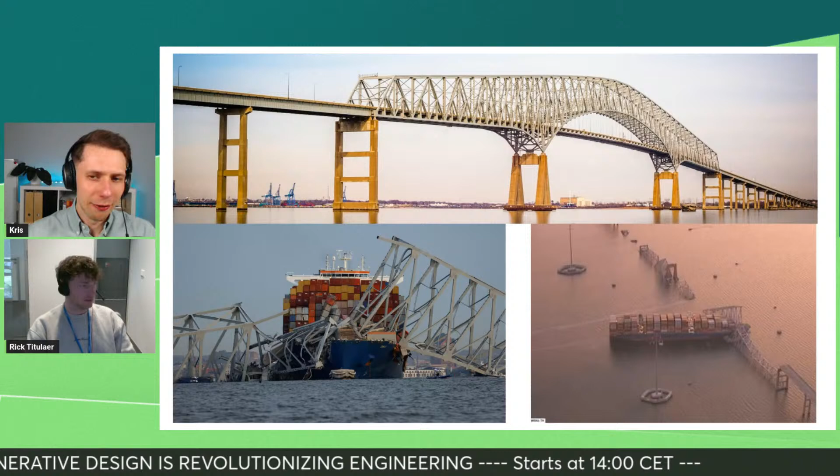But maybe if they're going to design a new bridge, some protection should be included, maybe like 1 kilometer before, some barriers, some lines showing. Because from my perspective as a structural engineer, you cannot design bridges for that kind of hit. I don't know what your opinion is about that. Yeah, that would be ridiculous, because then you would overkill all the sizes probably for once. There are other measures to take, like you mentioned, dimensioning for wind, for earthquake, for all the traffic loads, and in some cases for small ships, but not for one this big. So it needs some protection.

So it was really sad. Some cars were on the bridge, so they are still searching. We are crossing fingers that the people will survive.

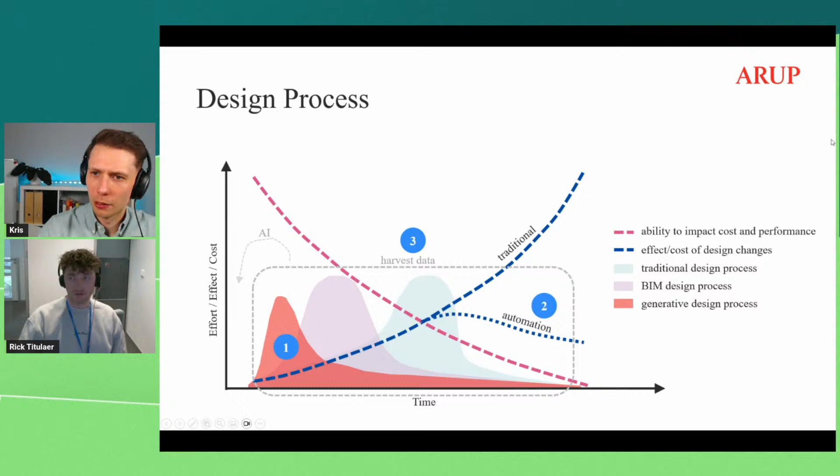Okay. Sure. So then, how do we go into this process? We, as Arup, believe in an integral design process where we tackle these design issues holistically, where we discuss client ambitions, define the boundary conditions of a project, and determine the variables. With this, we can determine our logic, where we can script an algorithm to generate alternatives, if it's buildings, if it's structures, whatever you can think of. And all of these alternatives we link to our analysis. So again, that can be a structural analysis, a solar analysis, a sound analysis, wind analysis. It can basically be anything.

When you run these analyses, it will result in data. And this data we usually define as KPIs, how good it will score. You can explore and evaluate that. And within that, you can do an optimization. So you can go back and change your inputs and iteratively generate more options. And then also you can save that data and push that to visual interfaces to explore design options collaboratively, and get informed data-driven insights. Currently we have done this mostly within Grasshopper.

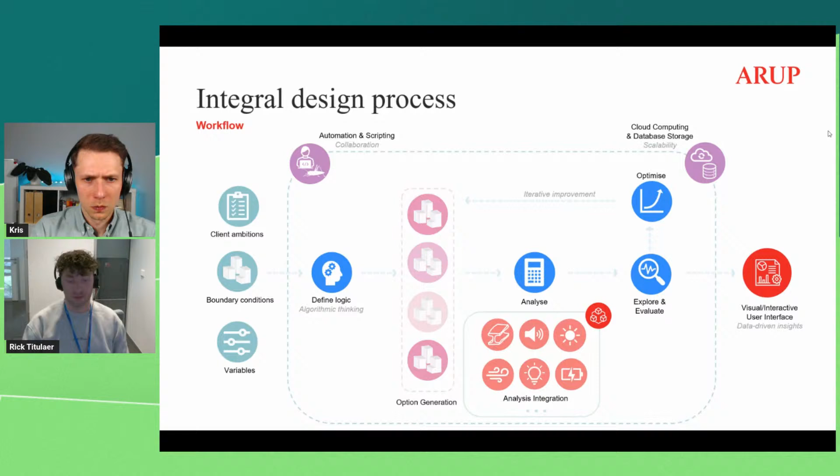So Grasshopper is our main engine, but we've also put Grasshopper in the cloud, so we can run our scripts in the cloud, which helps us to scale and also to store all of the data online. And with this, we can start to explore more options, because in the early stage you need to make thousands of decisions, and then it's interesting to explore the design space.

Like Tristram said, find options that you might have not thought of before. You can actually design efficiently and quantifiably better. You can prove that your design is better than, for example, a benchmark design, because you have that data. And in the end, we aim to collaboratively find the best fit compromise, because the optimum, we believe, is not always there. It's always a balance between different KPIs.

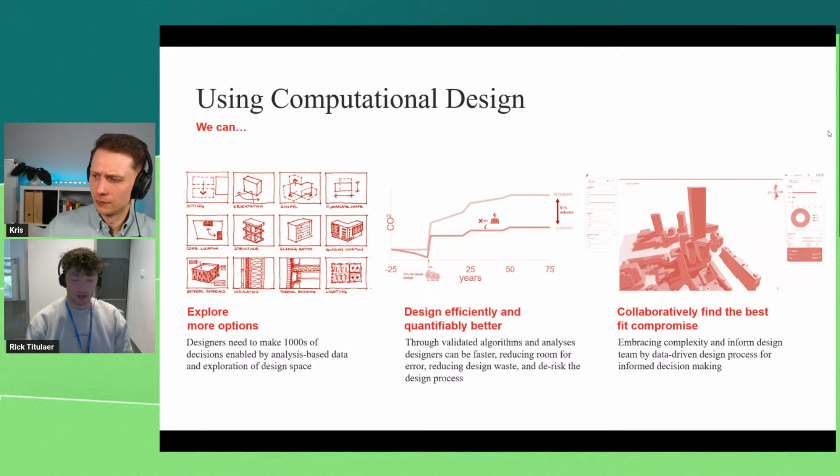In some cases there is an optimum, but I'll show you in some project examples what I mean by that, and also in the live demo in Grasshopper later. Yeah, we know that the term optimum is different from different perspectives, right? From the structural engineer, as we are structural engineer designers, the optimum is a different aspect for our client. The optimum maybe will be the cheapest one, or maybe the most sustainable. Exactly. So that's what we usually face, and I'll now jump to the project examples.

So what can we do with generative or computational design? I'll go from small to big, and I have 4 hopefully really cool projects to show. The first one is actually quite small. It's the Stedelijk Base in Amsterdam. Together with OMA Architecture and Rem Koolhaas, I was tasked to design the structure of this very thin steel cantilevering structure.

As I said, together with Rem Koolhaas, it was very interesting. In my first year in Arup, I got to work with star architect Rem Koolhaas himself. We provided structural design, but also acoustic design, vibration testing, etc. So I have a video. This is the Stedelijk Museum. In the basement, we designed these exhibition walls. They are very, very slender, so prone to vibration. And you can imagine with very expensive art, we need to check if that's structurally sufficient.

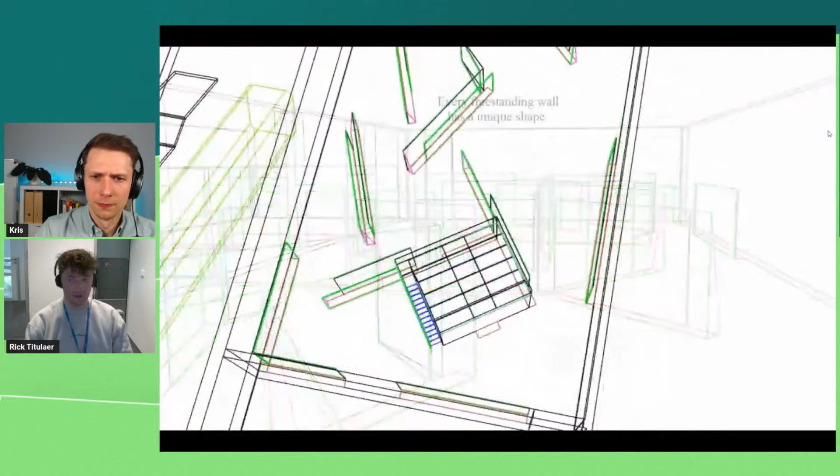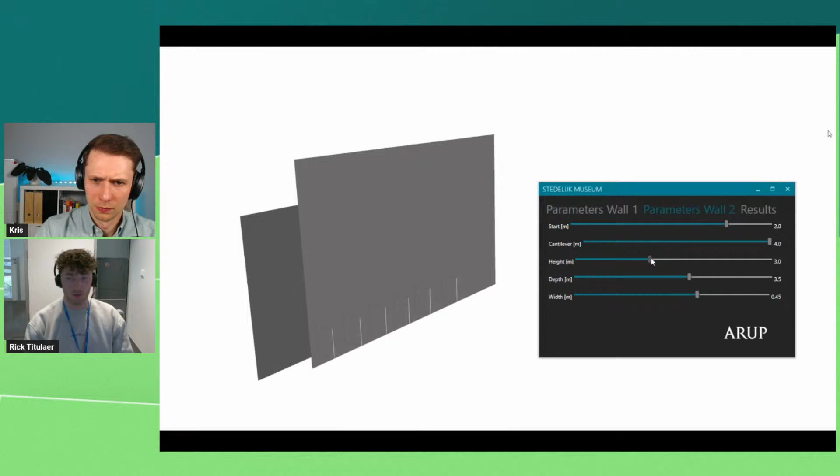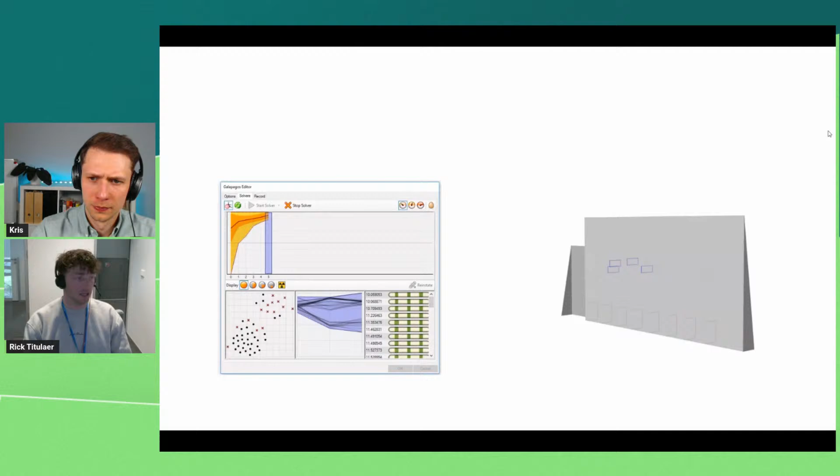As you can see, all of these have a very unique shape and are connected with steel sheets and bolts, so fully demountable. We created a parametric script where you can assess all of these 23 different configurations on static criteria, but also dynamic criteria. What if someone would fall into the wall? We could measure the responses. We stiffened the structure, because it was a bit flexible in the beginning. And in the end, we used optimization, Galapagos in this case, to minimize vibration, to add stiffener plates in between the walls. And this resulted in a very unique exhibition space with limited amounts of vibration.

And also, the exhibition walls were there for 5.5 years. They were recently demounted and recycled, unfortunately. But many people were very enthusiastic about the very slender structure of just 15 millimeters and 4-meter height. And there were art pieces hanging from these walls which would cost more than $1 million. So I can imagine it should be good optimization for all the vibrations and so on.

Yes, yes. And also Rem Koolhaas really loved the process, because we had sort of a random pattern of these stiffener plates, but also we tried to minimize these plates to find an optimum. And he quite liked that interaction between the walls, which actually worked quite a lot to stiffen it up. And it looked really, really cool. We had a lot of different configurations and constructed it.

And you can also imagine, because you could actually touch these walls when they were still there, we had to test different cases. So in one case, we tested what if an electric wheelchair would bump into the wall? What would be the vibrations? And we had vibration criteria for all of these expensive paintings so that they would not fall off. So that was a really cool case as well while we were constructing this. Yeah, always testing that on site is really amazing, and just comparing results. Exactly. It's the best we can do from the structural designer perspective.

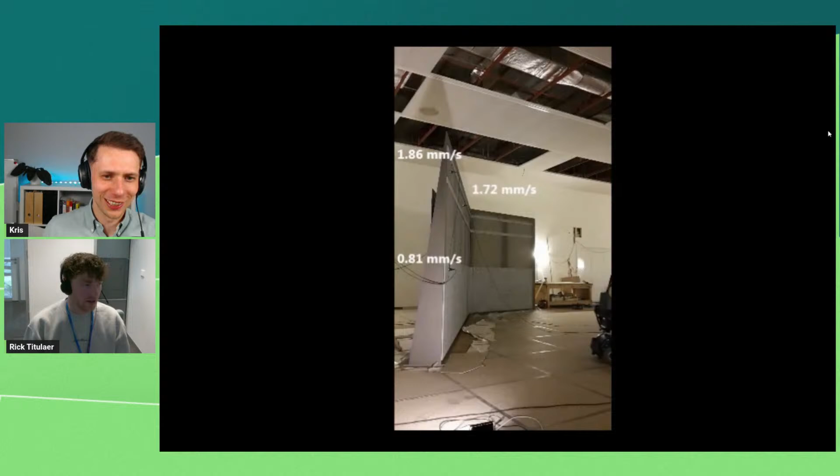All right. Next project, Kris? Yeah, let's go. All right.

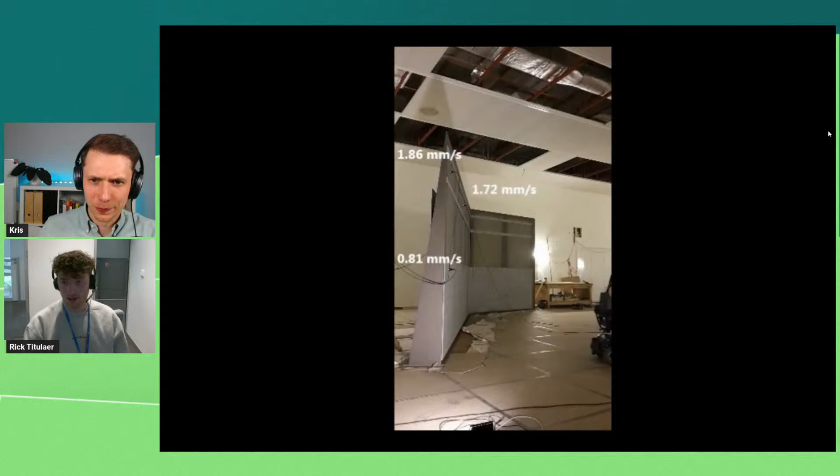So the next one is a bit bigger. It's a project I've been working on since COVID started. It's a residential or mixed-use development in Amsterdam called Elemento, of about 14,000 square meters with Koschuch Architects. We delivered multidisciplinary services on this project, which means structural design, building physics, acoustics, etc.

And the concept we came up with in the competition was to generate a building that would be shaped by the elements, because it would be positioned in what we call the Arup triangle, a few projects in Amsterdam which were done by us. We wanted a very healthy and comfortable building, so looking at sun hours, daylight, wind, and exploring different configurations on different scales.

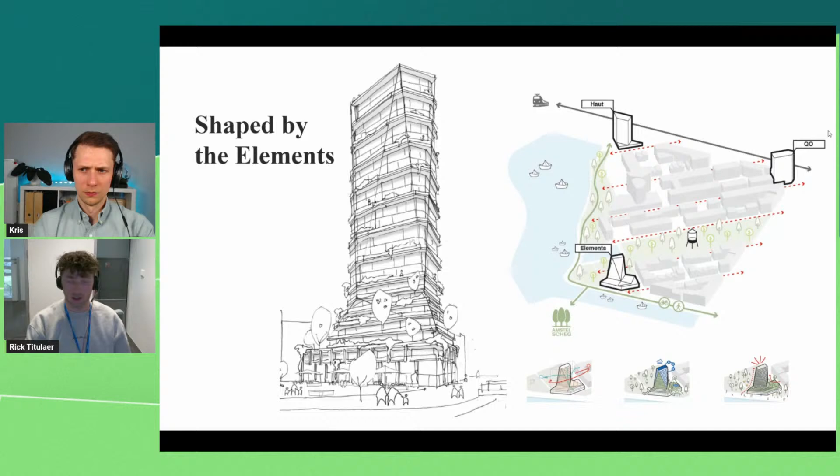On the building scale, we wanted optimal daylight conditions inside the floor plans and optimal sun hour conditions, because we love the sun in the Netherlands, in the atrium, but also on the neighboring buildings. On the neighborhood scale, we wanted to get the green from the neighboring parks onto our buildings and have a good wind climate on the roof and on the ground floor. And on the planet scale, we wanted an energy neutral building, so we created balconies around the building with PVs integrated.

And we were able to reduce the embodied carbon by introducing quite a lot of timber in the structure as well. So you can say that the most optimum solution in the Netherlands is the structure with the most daylight, a lot of sun, and very sustainable. That's what we aimed for. We couldn't build all of this into our script at this stage, because it was a competition, so we had to come up with solutions very quickly.

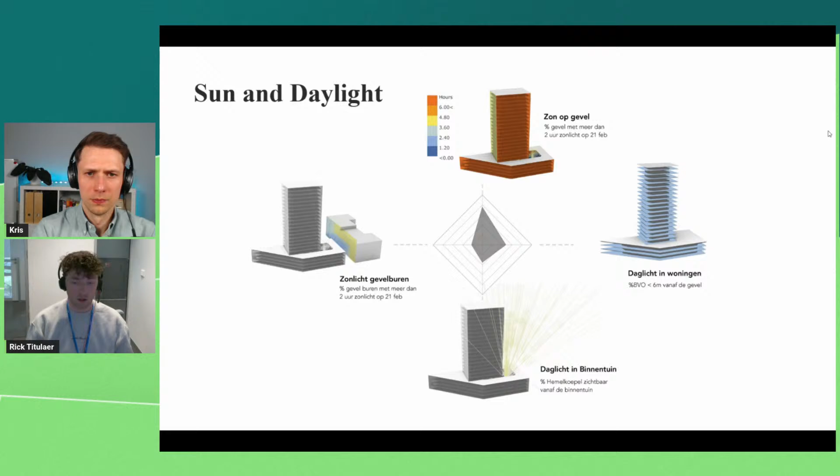So we came up with the most important ones for shaping the tower, which were sun and daylight. Basically sun on the facade and on the neighbors, daylight in the atrium or garden in the center, and on the floor plan. And then we said, okay, what if we let the computer come up with different shapes of the tower? What would be optimal for these 4 KPIs? So we created a script that could generate different forms of the tower.

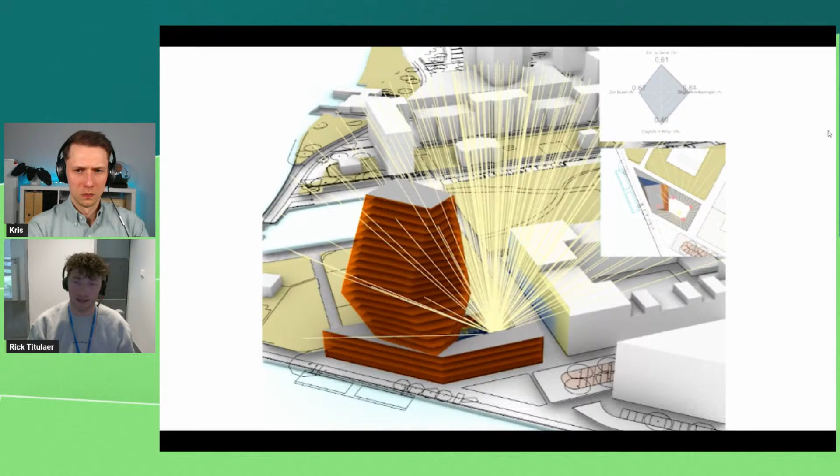Initially it was more like a pyramid, the first sketch from the architect. But in the end, we got solutions that scored better on these 4 KPIs, with more of a cantilevering structure to the middle and more narrow to the top, which was quite interesting. We ran through thousands of iterations and came up with the concept of this cantilevering tower, where the balconies would provide optimal PV to store or get energy from. It also helps with the wind climate in and around the tower.

We could introduce more green area on the roof. And we reduced the carbon footprint by implementing timber in the top floors, where we had the double height apartments. So the in-between floor would be a timber floor, and we designed the plinth to be timber as well. So quite interesting.

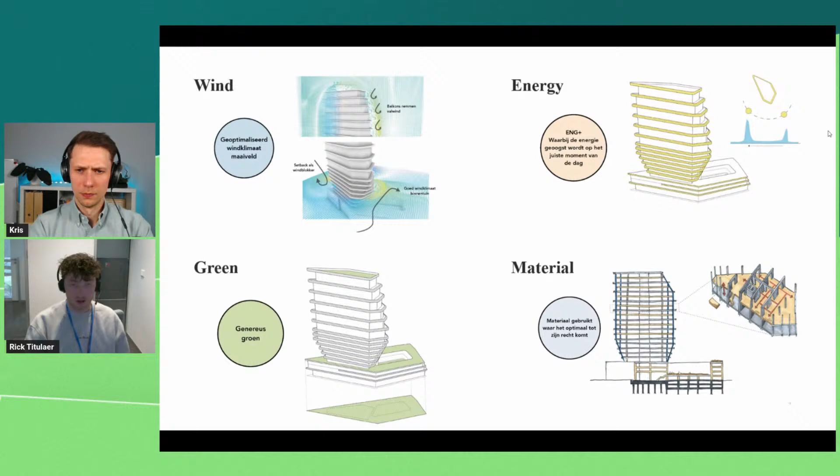And currently, my role, I started in 2020 on this project as a parametric designer and structural engineer. Now my role is lead structural engineer on the project. So I'm finishing the project hopefully next year.

Interesting. And about the optimization algorithm, I saw that there was some limitation from the project. I saw the curves, like the yellow curves from the basement floor. Was it some limitation on how much sun will go inside, let's say, a restaurant there or some atrium? Yeah, so there's also an inner courtyard where there's

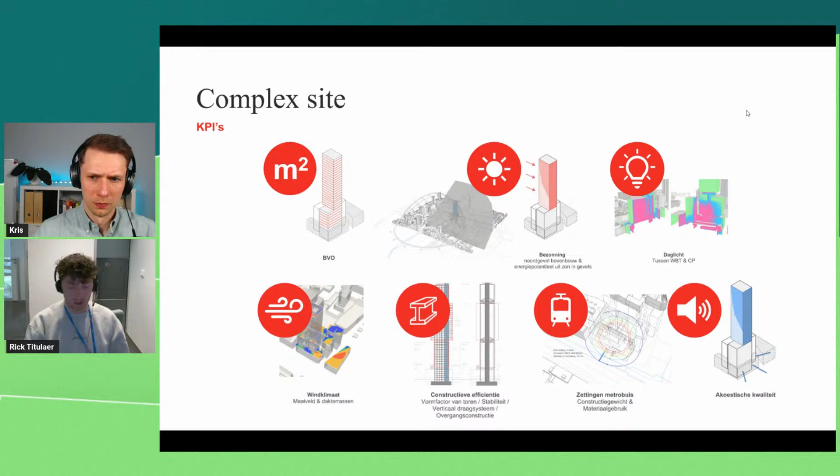model, where you try to find the wind patterns and where the wind speeds get higher and lower. That can take up to 4 hours for one model. So within Arup, we invested in research where we could actually predict the wind comfort or the wind speeds within milliseconds or seconds. So instead of running 1200 CFD models in 200 days, we could run 1200 machine learned models in 20 minutes.

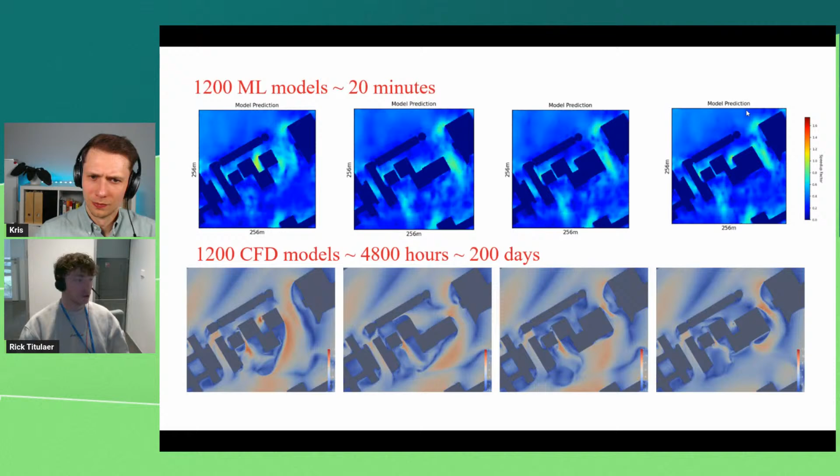And this really helped us to explore the design space of this tower. So we did lots of configurations of the top part of the tower, looking how it would affect the settlements, playing with the daylight on the building next to it, rotating, cutting off the tower on the top to see how that would affect the sun squares where people were sitting on the terrace. And in total, in a few weeks, we designed up to 11,000 options and analyzed it to about 20 KPIs.

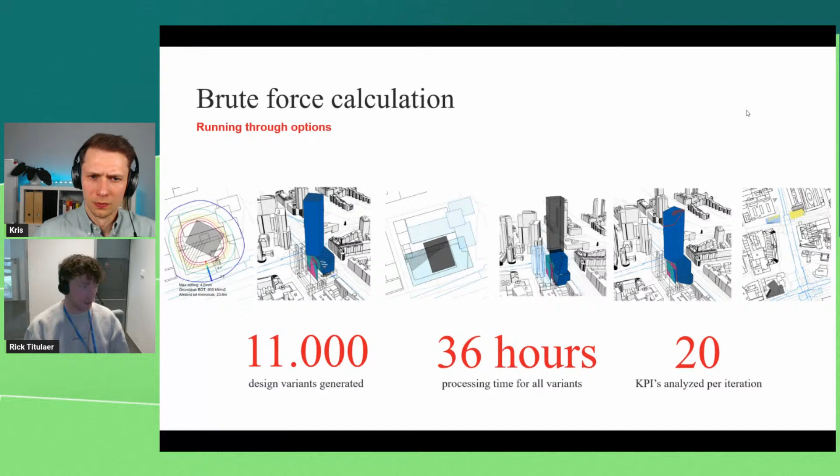And you might think then, how can I make this presentable to our client? So we made use of our own built parameter space, which looks like Thornton Tomasetti's Design Explorer. I'll show that later. But parameter space basically is a visualization of your data. Each line in the space is one design option.

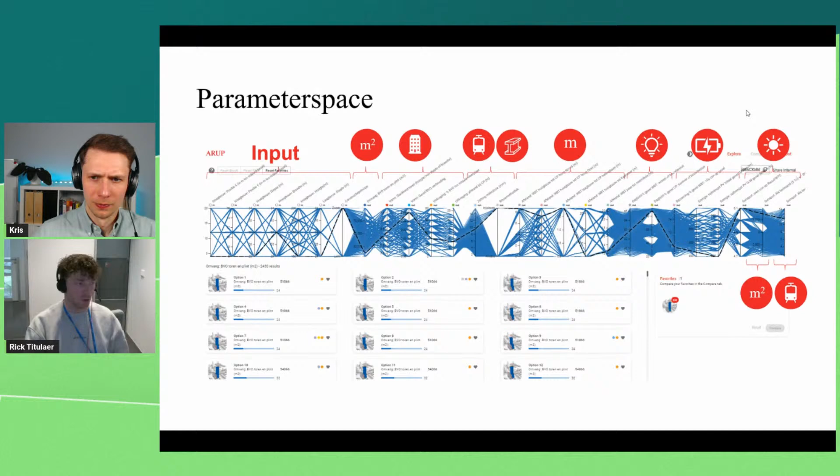And with this space, you can actually filter. So you can say, I want to minimize my settlements, I want to maximize my sun, I want to maximize my daylight, and which options fall within that criteria. And it's a really interesting way of designing because you can actually explore different configurations on most important KPIs.

So here you see the final 3 options. So one option might be really good for sun, daylight, and settlements, but another option might be really good for constructability. We also put in a constructability KPI. Let's go back one more time. Distance to other buildings, energy potential. So how much energy can we get with PV panels on the facade?

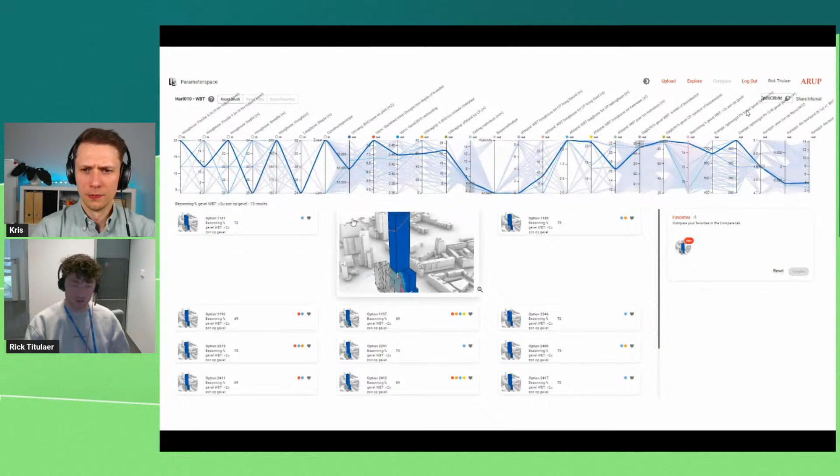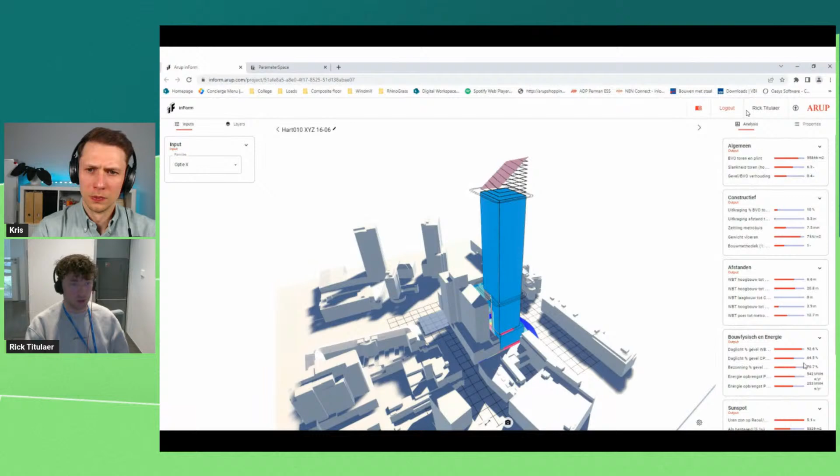And in this way, we actually came to 3 completely different options that were chosen by the client and the architect. So we actually provided this space to them, and together we chose 3 options. And these 3 options were then presented in our Inform platform, which is a visual interface of our design solutions, where we can explore KPIs on the right hand side and explore different inputs on the left hand side. And this then helps the client to interact with the model, to go around, see how the shape of the tower will look like.

And in the end, after the pre-concept design, after these 3 options, we created one option W, and that was the option that we're designing currently. So this is the view from the tower, and on the right hand side you see the current design that we're progressing as we speak.

And the software that you provided to the client, have you created these graphs yourselves, making all this optimization, just showing graphs and solutions? Is it your design in Arup? Yes, it's an Arup platform. We started to create that 4 years ago, and now we gradually build it up so the client and our design team can interact with our parametric models.

They can explore design solutions, see what if they change one parameter, how would it affect different KPIs. And usually the feedback is really positive because they can actually see the difference going from a benchmark design to option 1 to option 10, that it actually is better. So yeah.

And the workflow was like you suggested three solutions that, in your opinion, were best for 3 different scenarios, and then in the platform Inform, you presented the solutions that everyone now can discuss and choose the best one. Exactly. So which one was chosen, just from curiosity? So it was a combination of X and Y. So they actually merged X and Y into W.

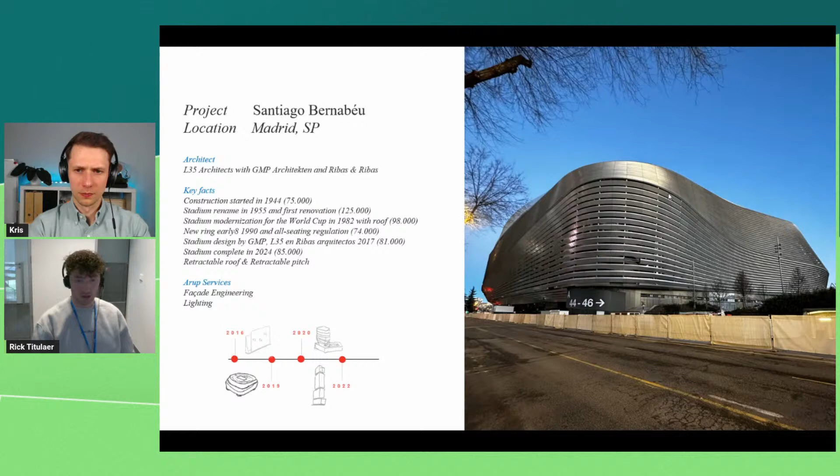We got to help on the new Santiago Bernabeu Stadium, which was originally constructed in 1944. Over the years they did quite some renovations, and now they wanted a big renovation in 2017, when they came up with the design featuring an iconic facade, a retractable roof, and a retractable pitch. We were doing the facade engineering and lighting design - just one section of the stadium design, which is almost intact from the original except for the roof and the new facade around it. They upgraded some of the towers in the corners to carry the roof.

Two quite innovative features, which I'm not going to talk about but are very cool, are the retractable roof - there are many videos on YouTube now because it's actually there - and the retractable pitch. Without going into detail, maybe Kris can send you some links later, but it's really awesome. I will talk about the facade design.

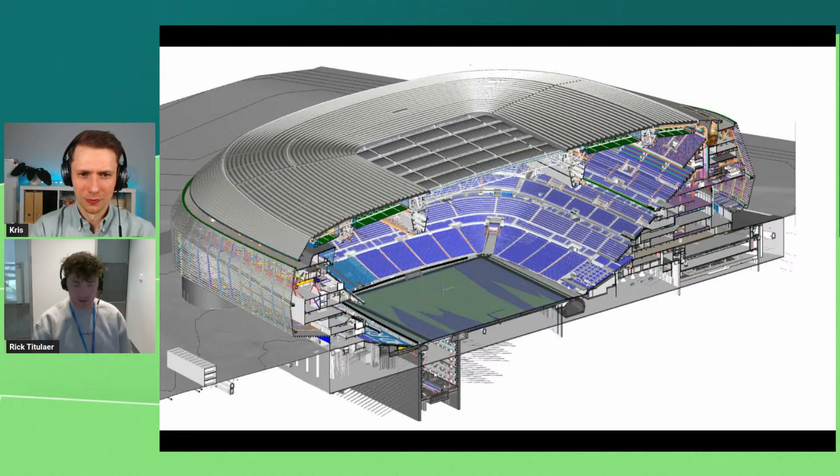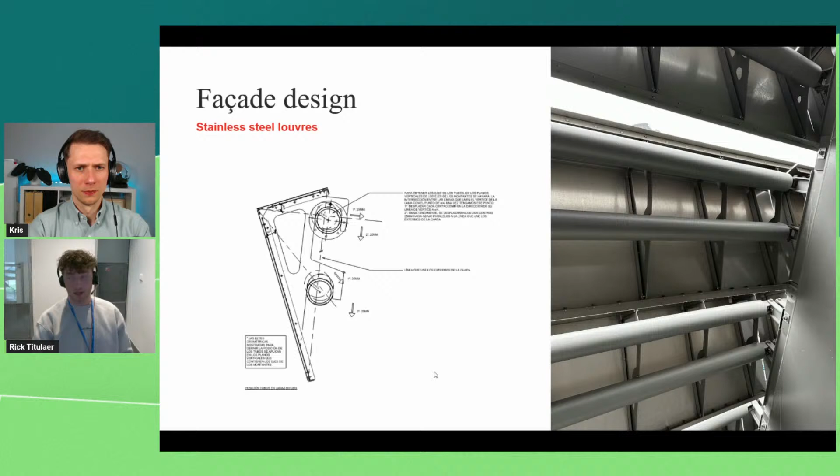I helped with the facade design - a complex geometry of more than 11,000 panels. They designed a system to hang these triangular panels from a secondary supporting structure. But you can imagine, with the complex shape I've shown in the previous renders and videos, it might be very hard to construct, or very prone to errors, etc.

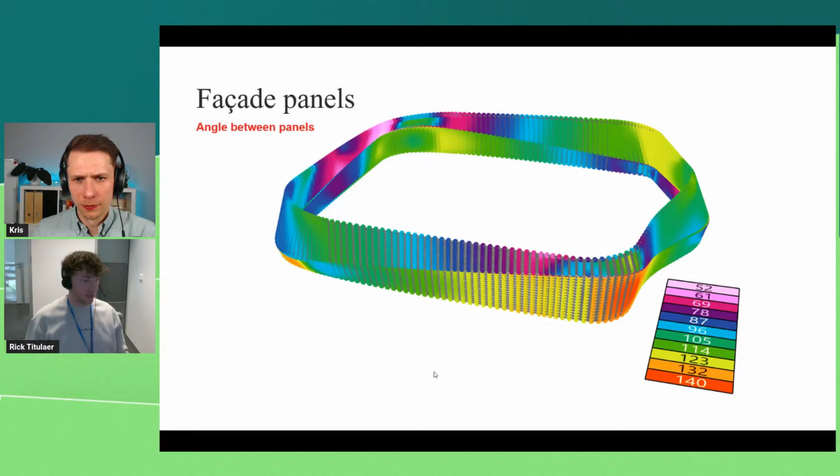So after some initial exploration of the geometry - like the angle between the panels, looking at these nice rainbow coloring images - the most interesting question came up. I don't know if you've heard the story about the car that was fried in London. They were very worried about cars and people being fried by the stadium. So we had to explore how the sun would reflect off the stadium into the environment, because there were big roads next to the stadium, but also large building blocks that might have issues.

First we generated the geometry parametrically. We ran a glare analysis, which is a reflection analysis of the sun. Then we explored configurations of the facade that could be better for reflection. We recreated the geometry, which would be the final geometry constructed today. We did some validation with more detailed glare analysis software, and exported our final design into Unity for presentation to the client. So what is glare?

It's basically the reflection of the sun on the facade to the neighbor, to the outside. We actually analyzed all these panels from the original geometry, and we could see there were quite some worrying cases affecting the buildings around and the roads.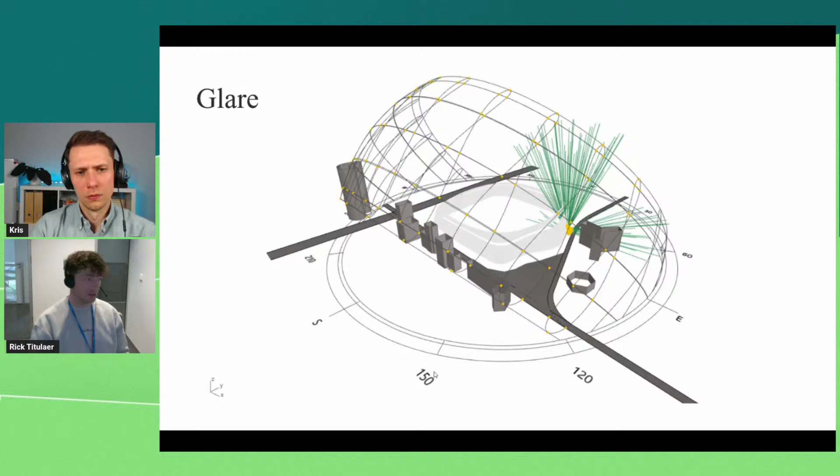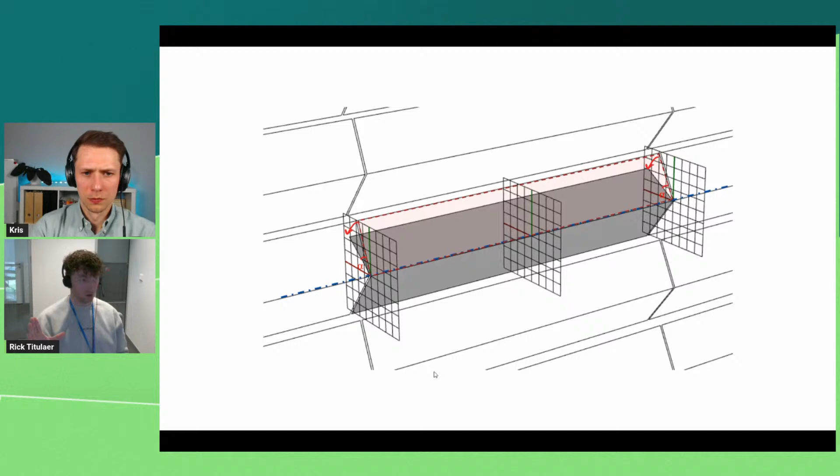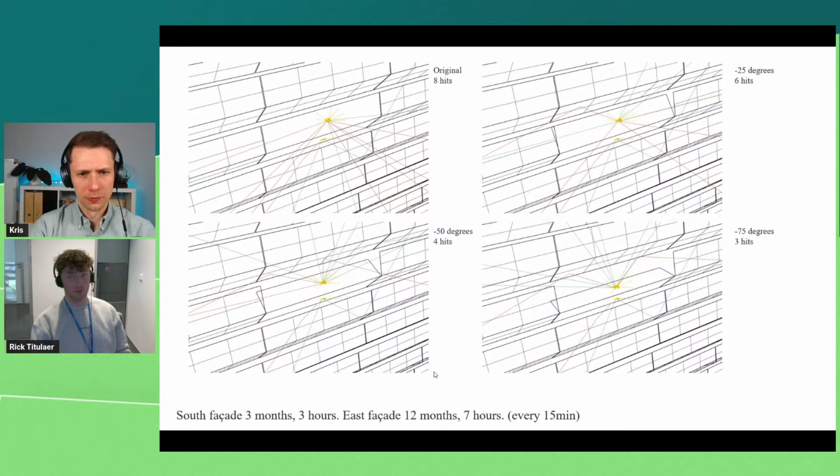So we decided to change the geometry to find better solutions for the facade. How we changed it was basically shifting or tilting the panels slightly or more to see how that would affect the reflections on the neighborhood. The whole shape of the stadium stayed the same, you just tilted the facade angles. Yeah, so the original shape we got from the architect, and we decided to explore new configurations.

Here you see one example panel. If you rotate it more and more, you go from 8 hits for this specific point to 3 hits, but then the facade geometry is completely changed. So it was also in discussion with the architect, to what extent can we change the geometry, and to what extent are we improving the glare.

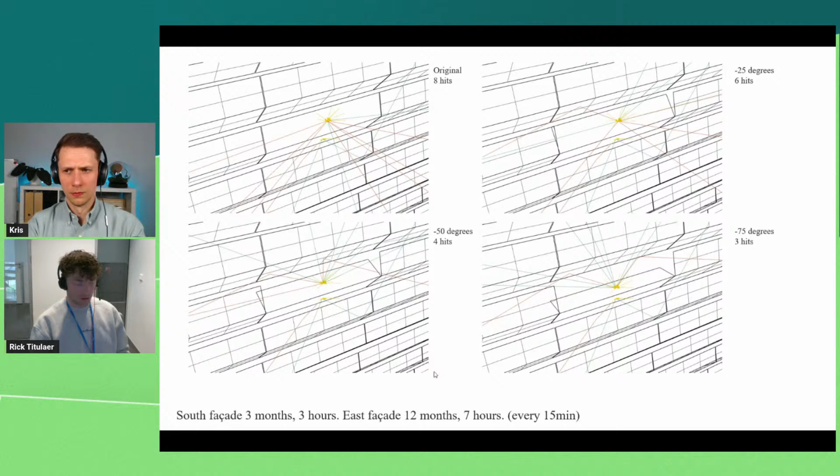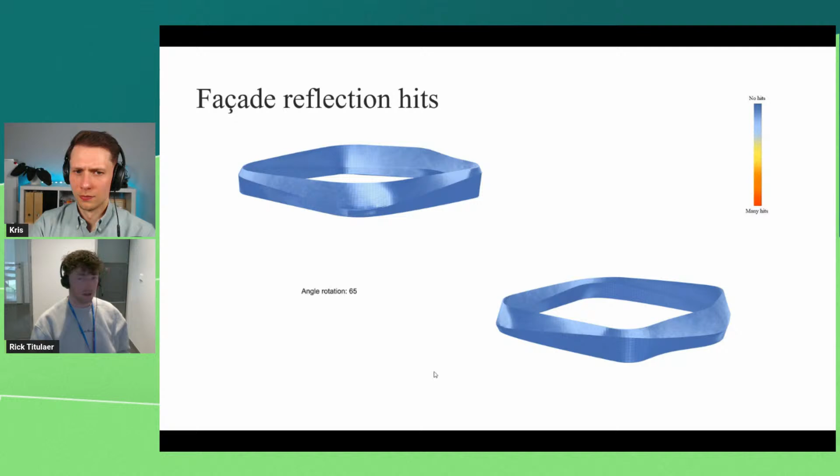So we built some algorithms to analyze that, because for more than 11,000 panels and different sun positions, it takes a lot of time. We built our own script that could actually calculate the reflection. Here you see the angle rotation of the panel versus the number of hits to the environment. If we rotate it a lot, it's more blue. If we do nothing, it's quite red, especially on the south facade.

So where then are we positioning our design? Do we want to deviate a lot from the original? That means tilting it a lot and having a very low amount of hits, but then the architect or client might not like the design. Or are we accepting some hits and changing the material reflectiveness of the steel instead? So we had to play with that.

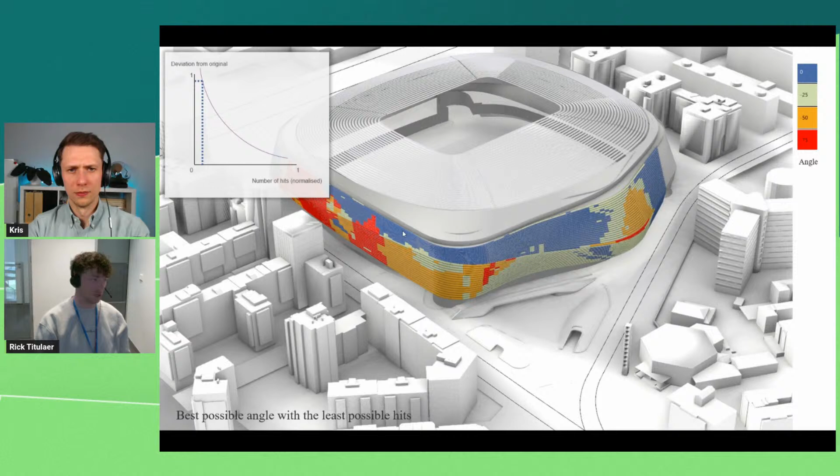But with our model, we could explore different configurations. This is an illustration of the rotation needed to have the least number of hits—you need to change your geometry a lot. If you accept a little more, you change it a little less. If you accept even more, you only have to change a few panels. In the end, we were somewhere in the middle, so we still had to change the reflectiveness of the steel as well.

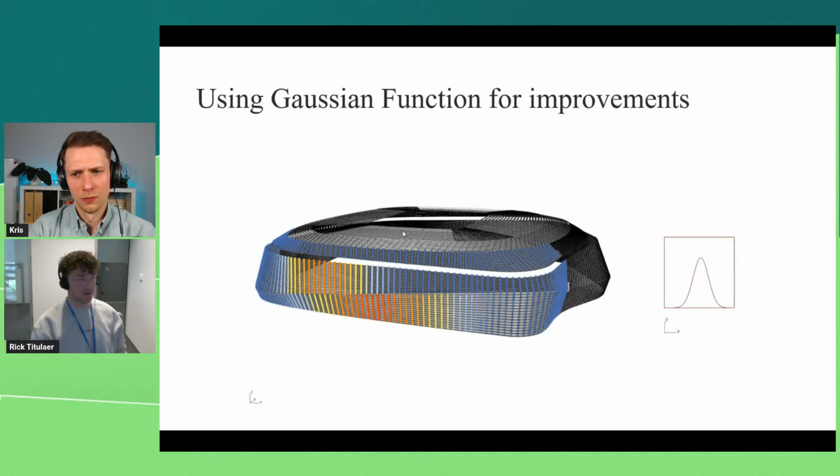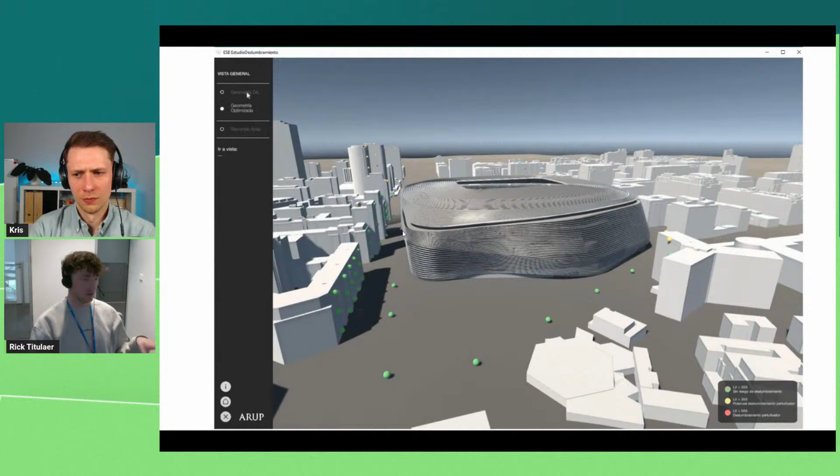But we created an algorithm to use the results of the glare study and still have a fluent facade design. With Gaussian functions, rounding and blurring numbers, we were able to recreate the facade shape for better glare results. This resulted in a change of geometry, which we presented to the client in Unity, where they could explore the different geometry configurations and see how the detailed design affected different locations. That was quite well received.

And here again an image from the back side of the stadium, from when I went in January with my colleagues inside of the stadium. Nice—and some nice, acceptable reflectance of the facade.

Yeah, that was actually what I was about to ask—have you seen the glare on the structure? Yes, I think it looks spectacular. I went for a few days to visit our office there. The first day it was raining, so it looked completely normal. But the next day it was sunny and it gave a very interesting feeling. It was not bothering, but maybe I'm biased.

You could predict where the glare will be, right? So you could compare the real picture with the optimization model and find that. I was interested about the one slide you showed, on the right side with a graph—the Gaussian distribution. Okay, so was that the algorithm to find the sweet spot, the most optimum point?

No, the Gaussian function was used to smoothen the results of the glare study. Sometimes one panel scored bad, and the next panel scored quite good, so the difference between them would cause a very abrupt change in geometry. Therefore, we smoothened the glare results with the Gaussian function to recreate the geometry in a fluent shape. That was quite interesting.

The live demo is about a valley in Austria where you have some houses, and they are going to construct a tower at a location in the valley. They ask: what's the most optimal location for all houses to have TV reception, but not construct a 500-meter tower. Okay, so that was the goal.

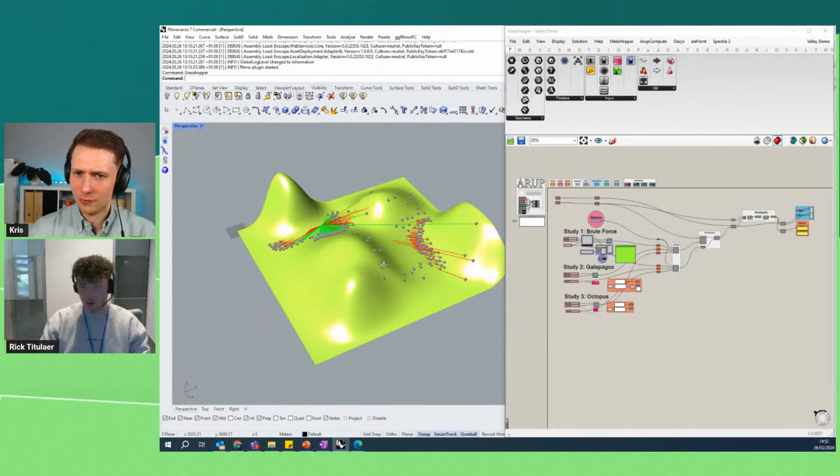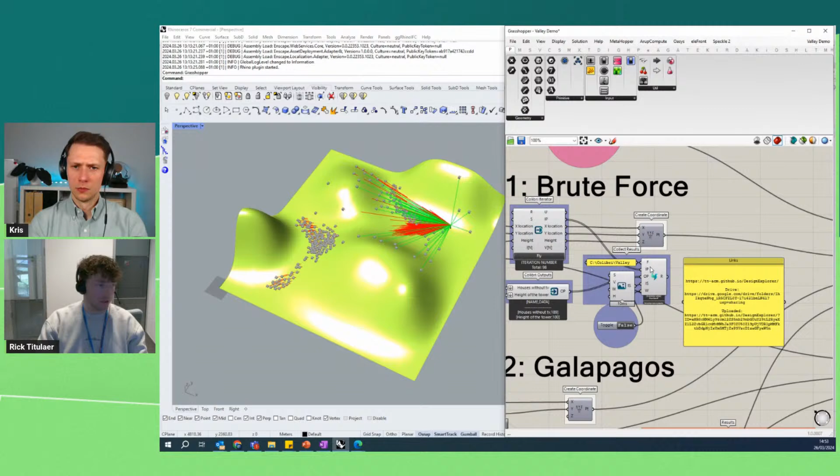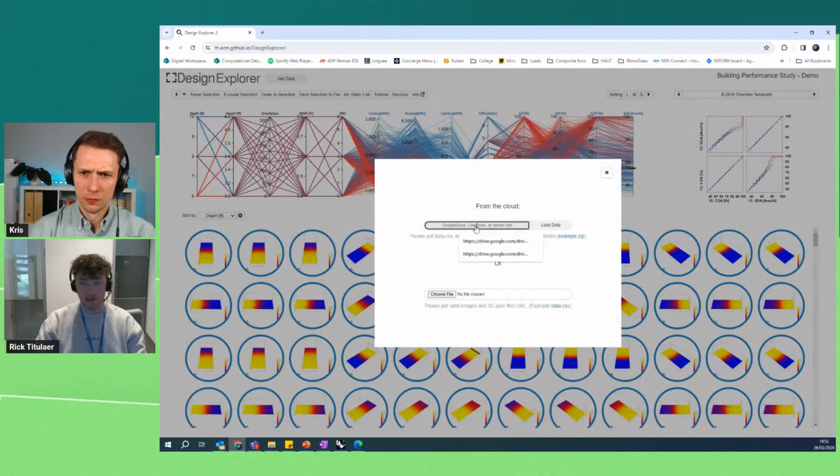So if I fly now, you see it will automatically calculate all the results - I already did this before. It stores the results and automatically creates a CSV file with images in a structure on your desktop. Then you go to Design Explorer, which is a free tool that looks like a parameter space. Then you say get data, you paste your Google Drive or wherever you've stored your results, and then here you can explore your design.

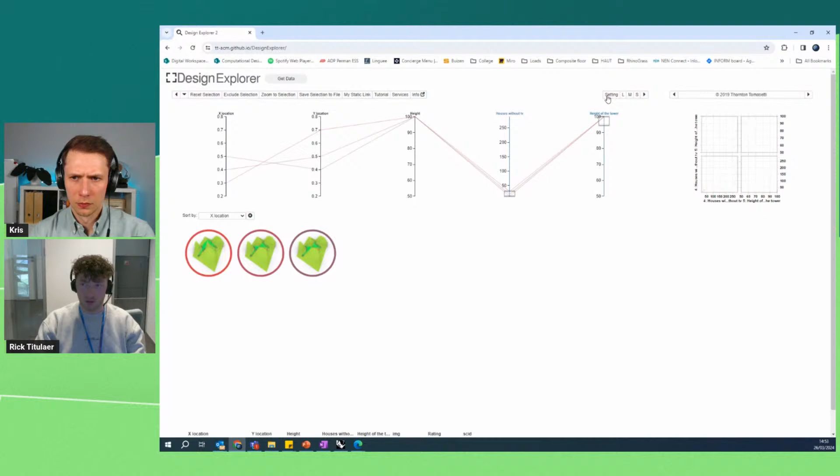So I want to minimize my houses without TV, but I also want to have a low tower. You see, I only analyzed 50 meters or 100 meters. So if I want 50 meters, there are a few options I can choose from - this is one location. So this is one approach.

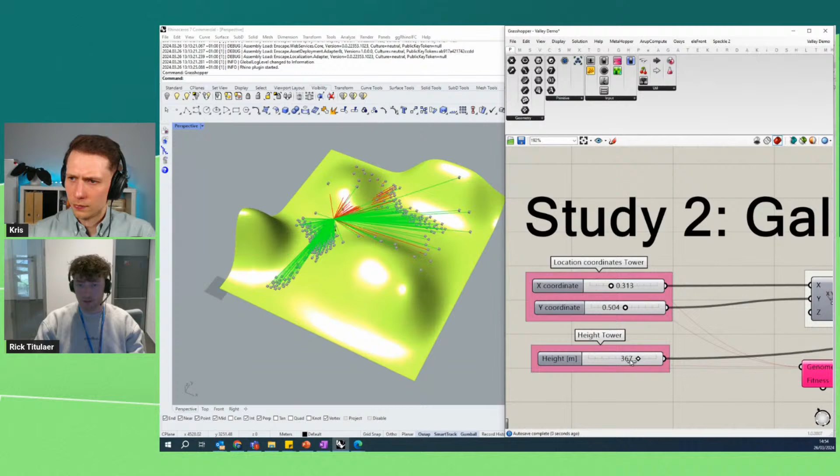The second approach is optimization. So I'll go to Galapagos and I say, okay, I define the location of my tower and the height of the tower. I want to minimize the height, and I want to minimize the houses without TV. I have built that into the script.

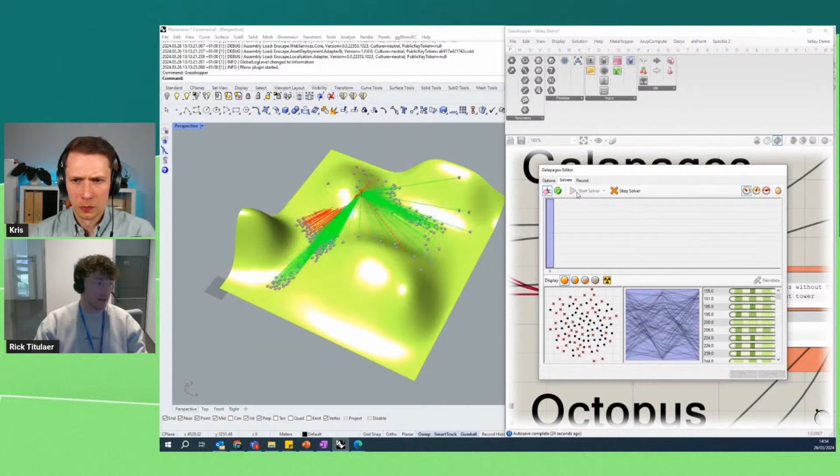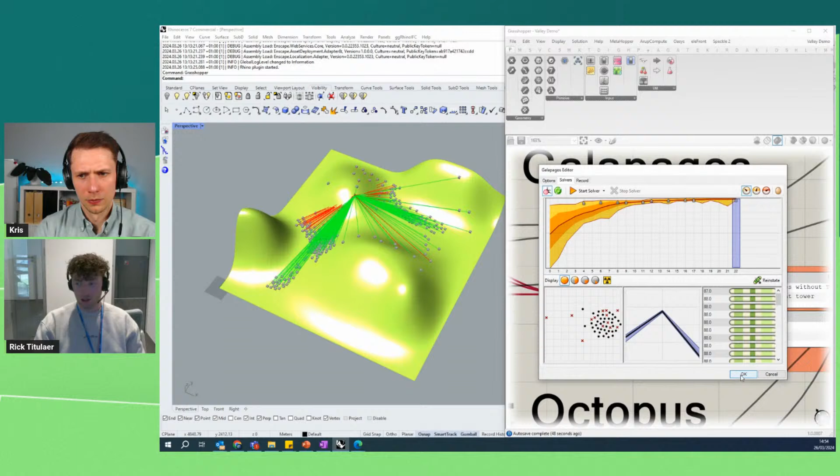So let's now say I want to minimize this with Galapagos, simply by adding up these two numbers, because Galapagos only takes one KPI or objective. Galapagos is actually trying to find a solution within that space every time, and for each iteration it will save a few of the best options and use that in the new configuration - it's the evolutionary algorithm. You can see it goes to this spot, quite interestingly - it will find a solution with 34 houses without TV and a height of 71 meters. That's interesting.

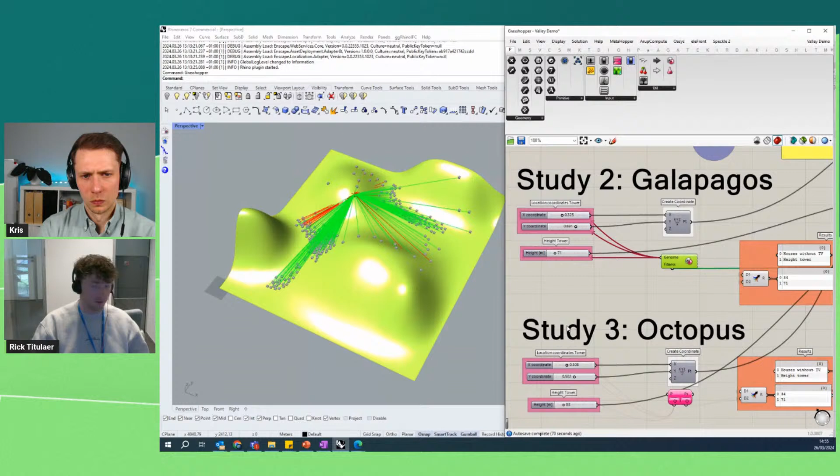But you can imagine if I increase the height of the tower, again, quite a bit, more people will get reception. So the other number will drop, as you can see. So 4 and 301. So where is the best option, you might wonder, because you might have only budget for a 50-meter tower, but you also want, as mayor of this town, everyone to have TV reception.

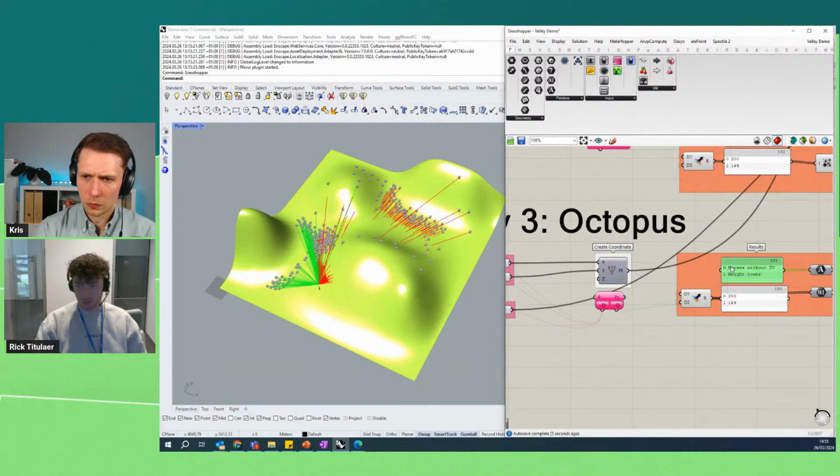So then you can go also to Octopus, which is the other solver, which can actually do multi-objective. So what kind of parameters do you have? Coordinates X and Y, and the height. So if I now again put in the houses without TV and the height of the tower, but now with Octopus, it looks a bit different. I'll reset and I'll start. So it will analyze quite similarly to Galapagos, but with a different algorithm.

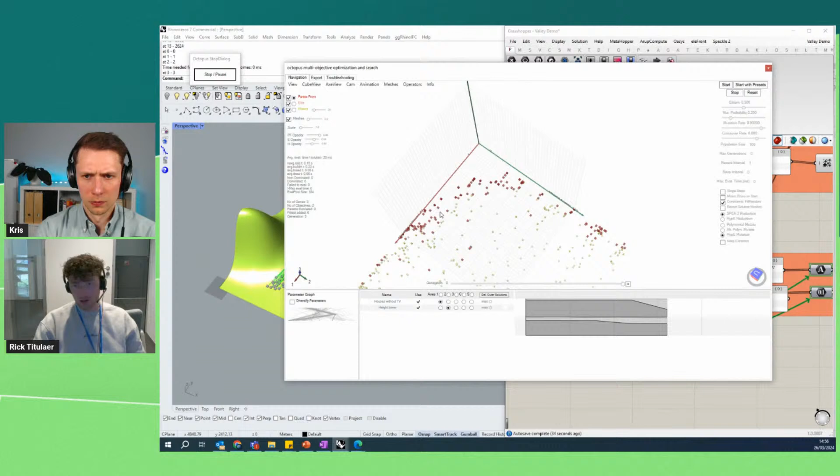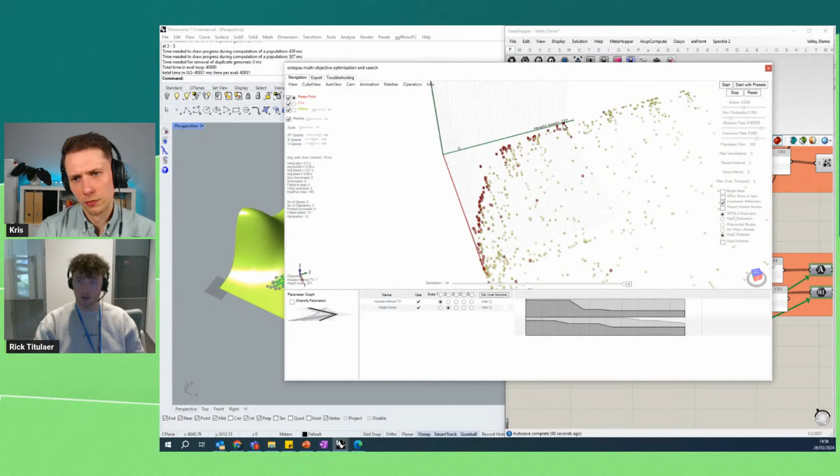But with Octopus, you can actually see the solutions on a Pareto front. So you can see for each iteration, I'm now in the 3rd generation, 4th generation. You are going to see a very interesting line appearing. Which is this line here. You see my mouse, right? Yeah. And this is the Pareto front, because, I'll stop the analysis, on one axis we have the height of the tower. Exactly. On the other axis, you see the houses without TV.

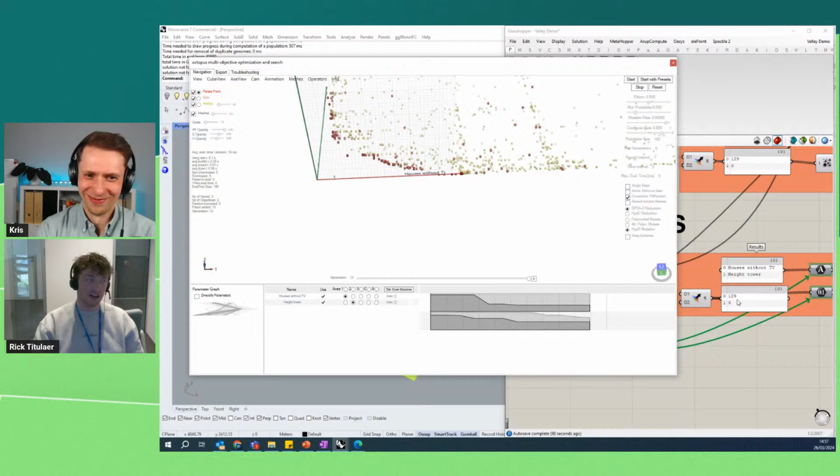So there is an option. I can reinstate that solution. There's a height of 200 meters and 5 people without TV. On the other hand, you also have a height of 0 meters and 129 houses. So you don't have to build any tower. Exactly. Or you can bring this design space to the table, to the mayor, and say, okay, what if we take this solution? It's quite close to both minima. So you have only a height of 55 meters and 23 houses without TV. Looks like the sweet spot.

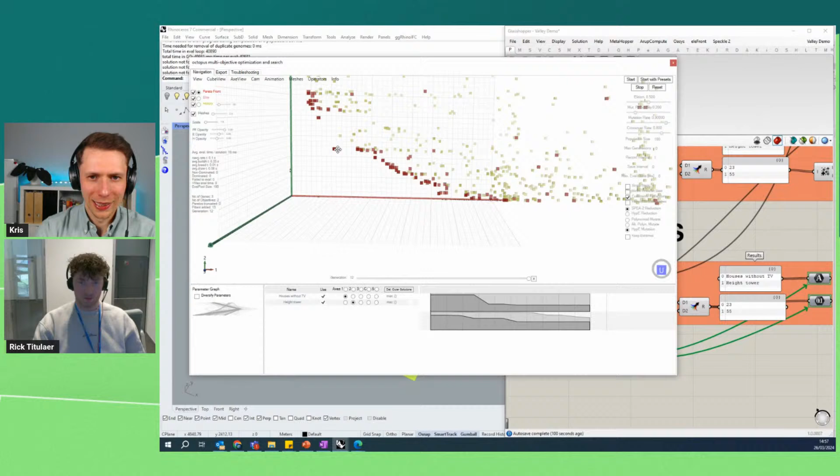I like this point where it's placed. It's really placed nicely here. Okay, so I'll mark that solution, and if I close my script now, I can bring this to the client table, and it will remember that this one was one of my favorites, or your favorites.